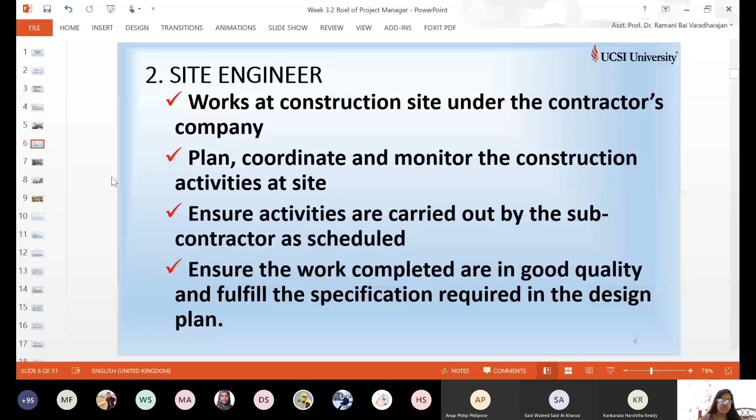His office is like this. It's hard to say—does anyone have any idea about this location? This picture is from Malaysia.

Anybody can name this? TRX. Very good. It's the TRX project, Tun Razak Exchange project, during its construction.

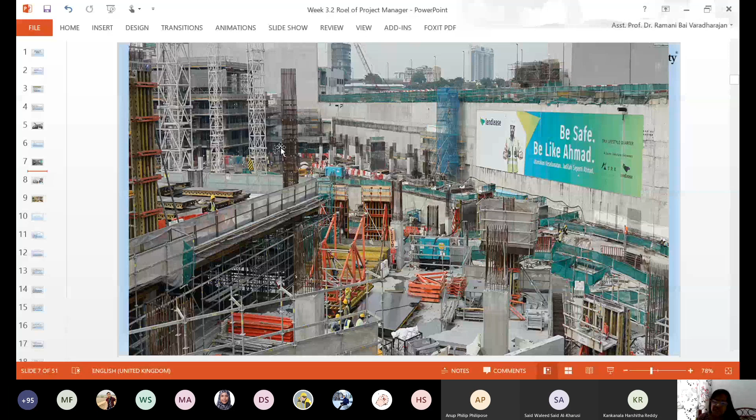His office will be somewhere in the corner, with a shelter or small hut-like office. He has to communicate, so the office is movable. It will be located somewhere in the corner for him to stay and keep the drawings, keep the materials, and keep his PPE.

So the site engineer also ensures the workers follow the safety rules at site. The site engineer's portfolio is to execute the work as per the contract documents, as per the specification, monitor, and make sure the safety is there.

Safety of the workers, he has to make sure. The site materials must be stocked safely. If it is a pipe which will get corroded over time, it must be covered with plastic. For example, if there is any leakage, he has to inform the project manager or contractor immediately, and ensure the works are constructed to the right line and levels.

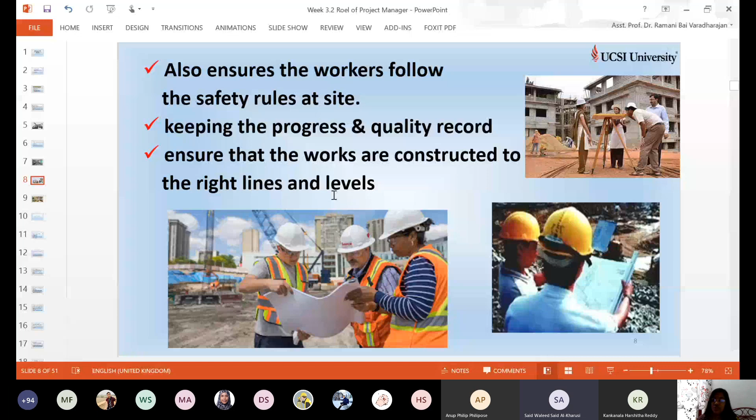He has to be monitoring each and every time and sending reports daily, based on the schedule or the planning. The site engineer has to look after all these things. He may have to go for the roofing, which should be at a high level.

What is this work? Roof? What is this thing? Looks like a slab, reinforcement, floor, roof and slab. Maybe overall it is the roof with the reinforcement. He is pouring the concrete, first filling the columns and then continuing with slabs and so on.

Columns, beams, slabs, he will proceed with, and then people are working at the site. Site supervisors should also be there to supervise whether all people are working in order.

Before starting concreting itself, he has to inspect all the spacing, number of bars, and especially the cover. Cover is most important, otherwise the reinforcement will come out. You have to check the cover at each and every point, or random points, to make sure it is proper so that the concrete is complete.

Here they are checking and discussing over the drawing, maybe about the location of elements of the building or the progress of the work.

And here the crane is lifting the truss, isn't it? The truss, they're going to fix it somewhere, maybe at the workshop, shop lot, or for any other purpose. You can see the cranes lifting. He can be supervising the lifting of cranes and materials from one place to another. So these are the things handled by the site engineer.

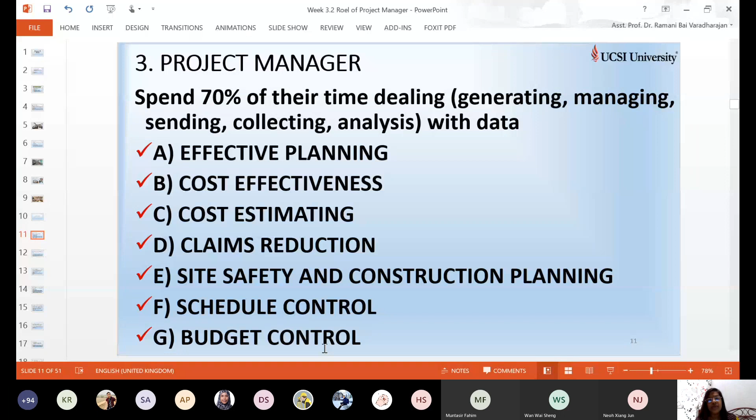Effective planning - for effective planning, he must be using software like MS Project or Primavera, or is there any other planning software you've come across? From the beginning I've used these two terms only. Maybe you students can explore more on this - any other planning software you've come across? Come on.

Planning software, scheduling software - maybe your father, parents, or uncle's company may be using one, whoever is the contractor or working as project manager will come across it. Mostly only two, and of these, they only use Microsoft, only Microsoft. Which version, 2000 or 2020?

I don't know. If you come across any information, please share it with me.

There are a number of projects nowadays because of the programming called Python. You know Python software, which controls a drone? They're similar to drone projects, drone flights, drone pilots, learning to become a drone pilot. Those softwares, because of the evolution of Python, you can get more software. You can develop your own software. Companies are developing their own software.

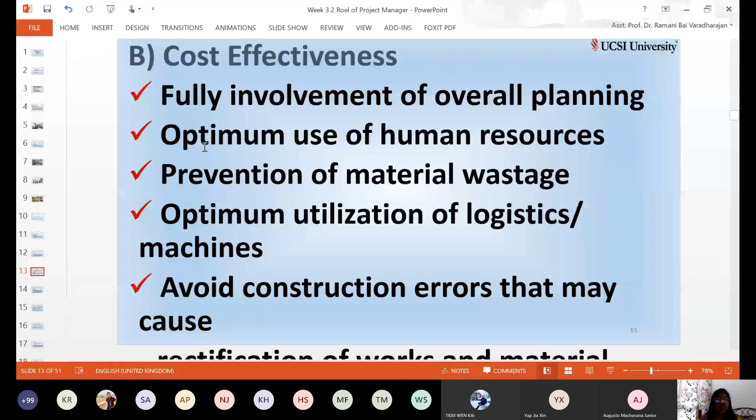Okay, cost effectiveness - did I do this? Wait, let me reduce the slide. Cost effectiveness, one moment. Okay.

Full involvement of overall planning, optimum use of human resources, prevention of material wastage - just now we were talking about this, right? Optimum utilization of logistics and machines, avoid construction errors that may cause rectification of works and material wastage.

Okay, I'll start from here. You need to involve fully, spend time - like the project manager spends 70% of the time dealing with the data. That was the introduction of this slide, isn't it? The project manager, having spent 70% of the time, has to plan properly. Optimum use of human resource, right?

You need to do trial and error during the planning itself - how many personnel involved for a particular work, per cubic meter of work, for the respective works done.

And then prevention of material wastage - avoid material waste by proper stocking, proper in and out commissioning, proper means of storage, and then optimal utilization of logistics and machines.

You should not be procuring material from very far, and the tonnage of lorry that you are hiring should be proper. For getting 5 tons of sand, cement, or other material, you should not be procuring 3 tons. You should know the capacity of the trucks and lorries you're using for your transport.

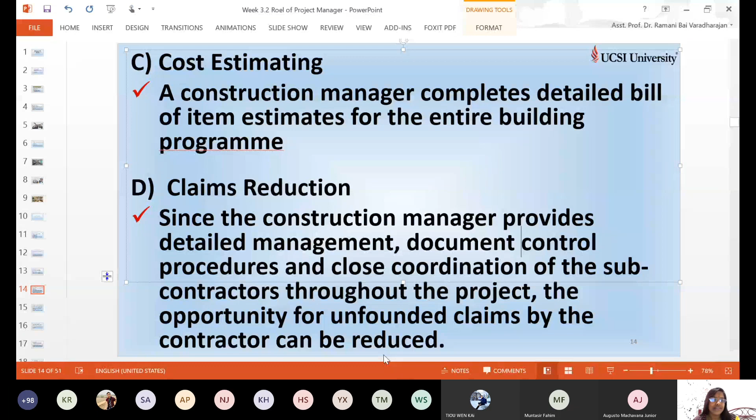At this point it is always challenging, claims reduction. Contractors say you push this bill to the manager, and the project manager says you control this claim. It is always challenging, but you have to play a nice role between these two parties, to promote and encourage them to be honest, and to have a good rapport, a good reputation for his work, his company, so that it is sustainable and comes for a long run. Avoid any unnecessary legal issues, time waste, and prolonging the project. So you should be playing a professional role between these two parties as a site engineer. Although it is very suffocating and very struggling, it is a good rewarding thing at times. You will enjoy being a project engineer or project supervisor.

Site safety and construction planning. The next thing that a project manager or project supervisor does is ensure site safety. Construction planning is crucial, a critical factor for the success of a project. A project manager or construction manager will plan for safety measures and construction phasing issues prior to the start of construction to eliminate delay. He has to prepare the site properly before starting the work, like how much length of nets is required for scaffolding, how many woods are required for scaffolding, what covering materials are required, what storehouses are required, and a clinic. Especially in some big projects, they have an in-house clinic for laborers for small injuries, giddiness, or breathing problems. At times they will address this using the in-house clinic at the site. So for a big project, there must be a clinic inside. He has to make sure the workers and all personnel involved in the construction are safe throughout the project. Planning happens at the planning period itself, not then and there. He has to have proper planning for safety.

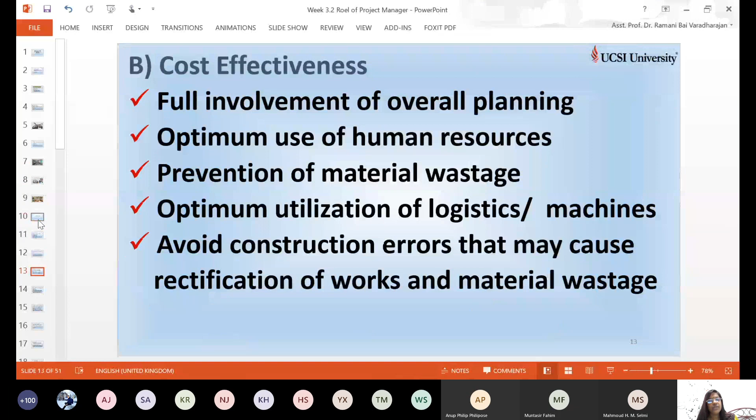Lastly, to ensure that the work is completed within the project schedule. All these things you have seen for the project manager. Any other question? Did we go through budget control? Yeah, we didn't.

Overall, three major roles are played by the project manager: time, cost, and quality, having good planning and execution of these three factors. What are these three factors we studied before as basic to a construction project? No, why basic? It's all and all - the three characteristics. Very good. Characteristics of any construction project should have time control, cost control, and quality control.

These three should be managed properly by all levels of people, not only the project manager, the client, or the worker. Here, to complete the project in a shorter interval of time, to complete it at the lowest cost possible, wherever he can save, reuse, or recycle, he can use it. Any example of recycling at this point in construction?

A very common one - earth can be reused. After excavating and going for flooring, you can fill the flooring with the soil that was excavated before, isn't it? Correct. Like this, can you think of any reuse of material at the site?

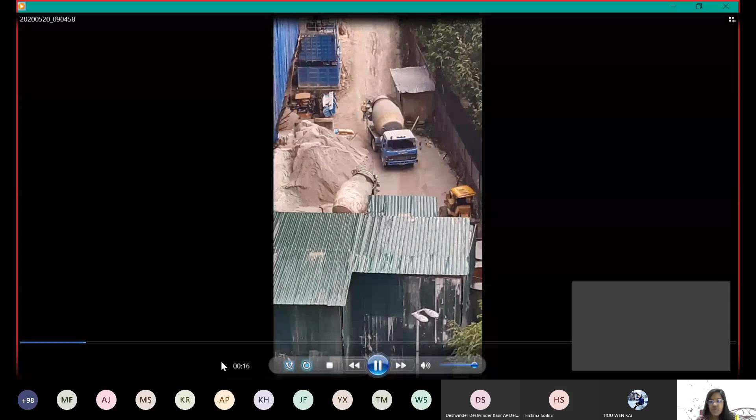A small video I captured today. Let me check. Okay, can you see? Let's go through the video for a while. Can you all see the video? Yes, yes, yes, Miss, yes.

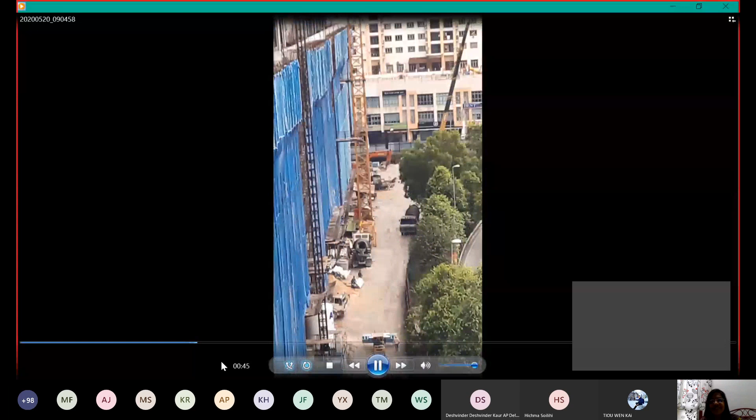First of all, find out the place - it should be familiar to you. What is this place? Have you found out? Maxim Residence, Maxim Tower - Majestic Maxim. Construction site - construction site of the Majestic Maxim.

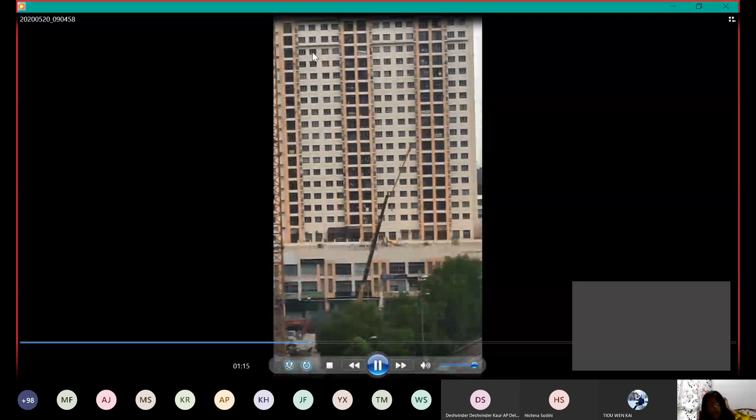Cranes are carrying the blocks. Big blocks are being lifted up - there is one here, there is one here, another one. They keep loading them in the crane and then place them at the expected location. And this is the site office for the engineers, mostly available at the end.

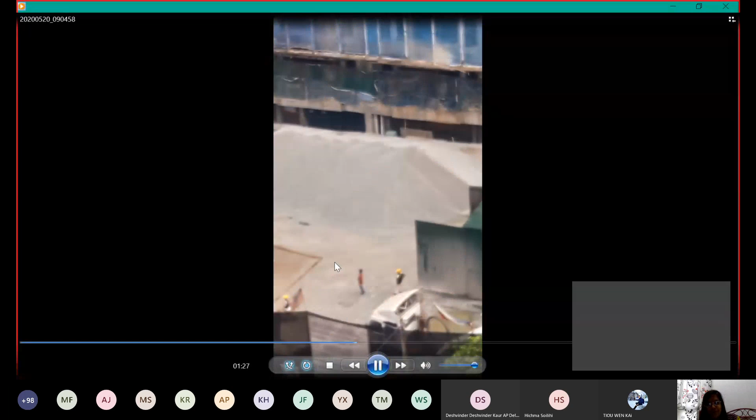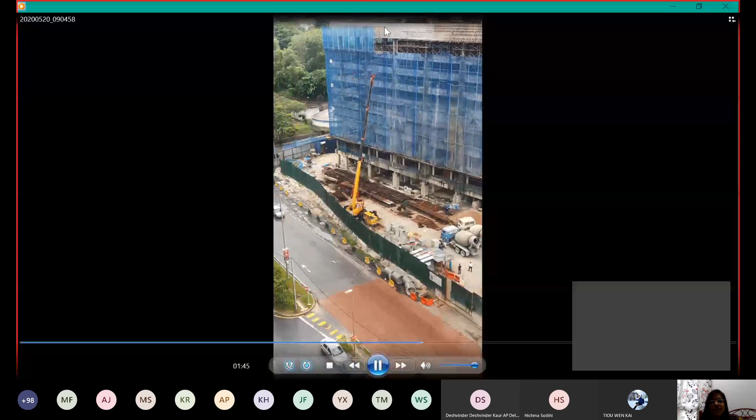What is this? What is going on here? What does it mean? The next - are those pillars? And there is something lifting. What is this? Lift. Sands.

Now I ask you the question - just observe. Can you name the construction activities going on this site? Name three activities that are going on. This is live, not live.

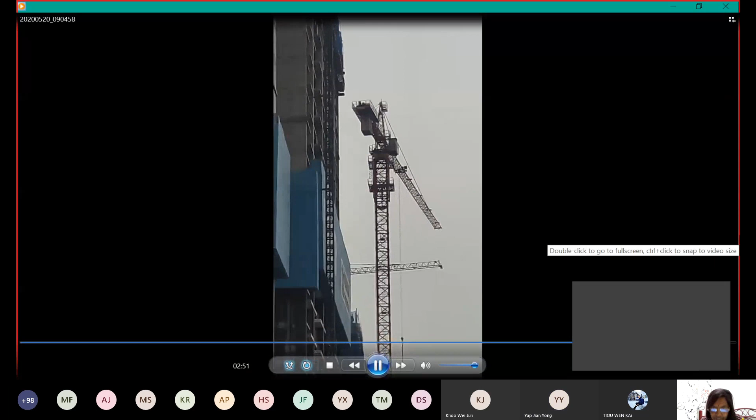Miss, can you type the question? Can you - Miss, your voice is not clear. Construction activities going on in this... Miss, can't hear you clearly, lah. Miss, we can't hear you, Miss. Because the audio is... Miss, just type up the question. So please finish the video, then I'll type the question. Finish the video.

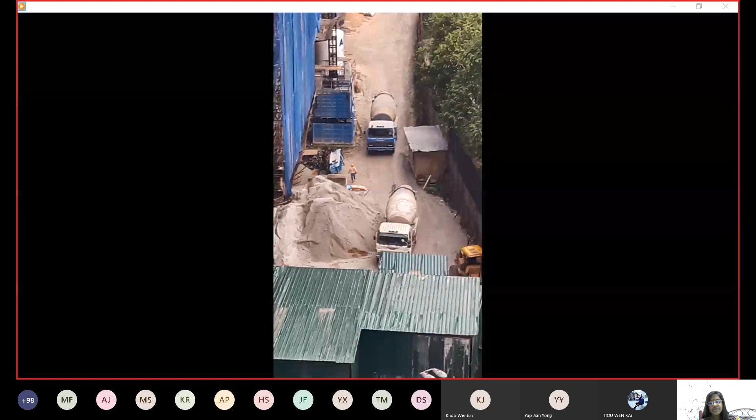You can see the materials loaded here - sand and cement mixed. No, you see here some people, something is brought out. Some materials are loaded and they are bringing them to some place.

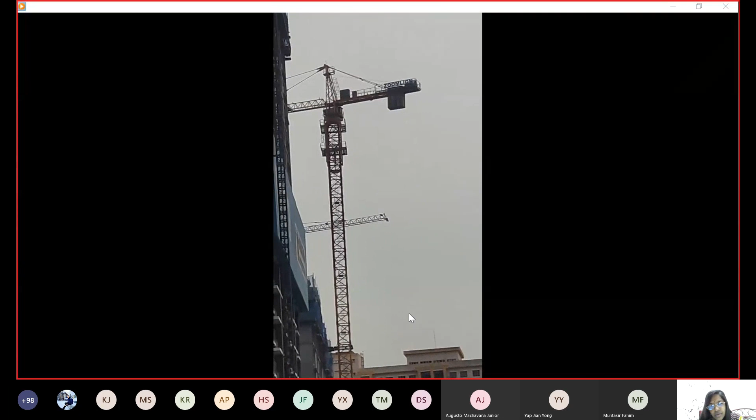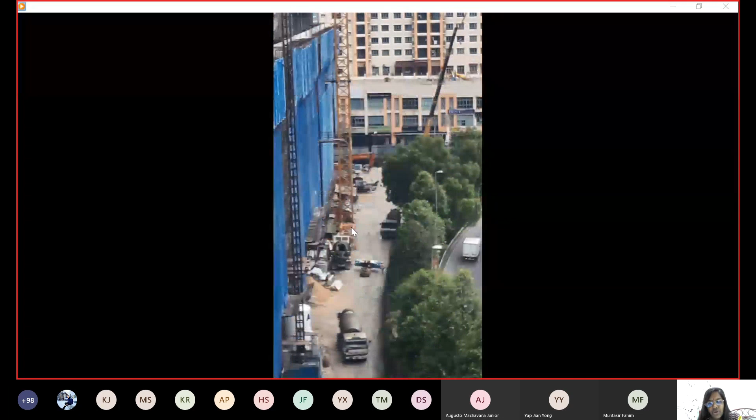Crane arrangement - one day I will do a video for the dismantling and assembling. As I told you before, you should be aware of all this information at the site. As project engineer, you should know all the activities happening at the site. Okay, I think it's going to end.

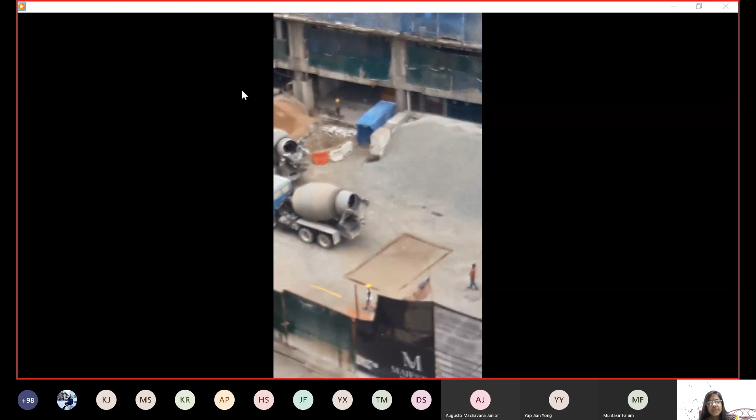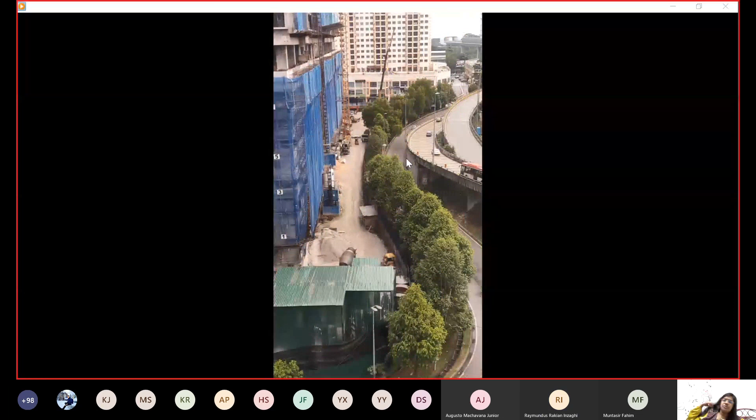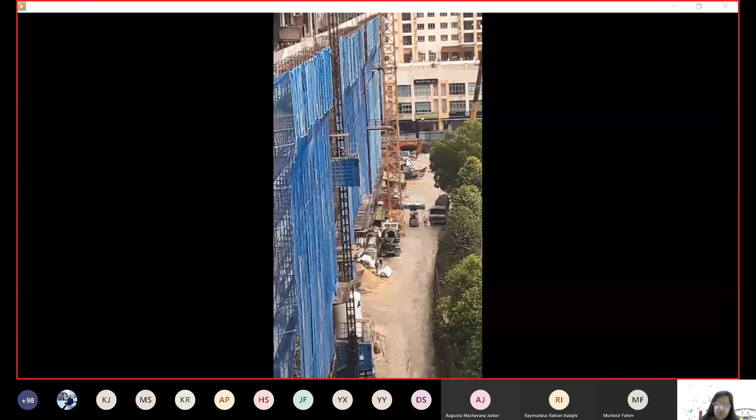Miss, I want to ask, for example if a building was destroyed, can we reuse the concrete? No, you can only use it as a filling material. It lost all its properties once it's hardened. You cannot reuse it as concrete, only as a filling material.

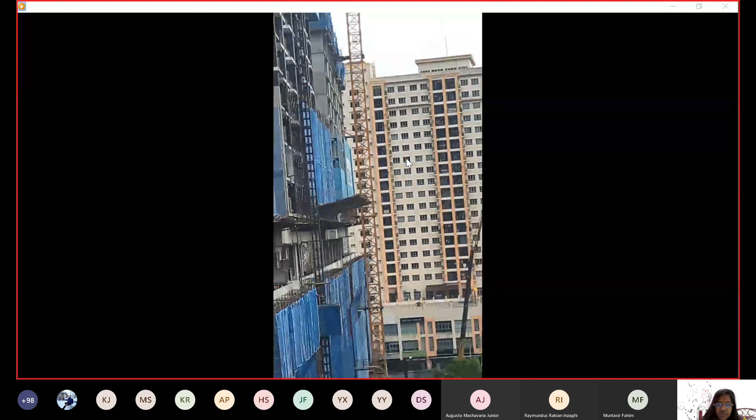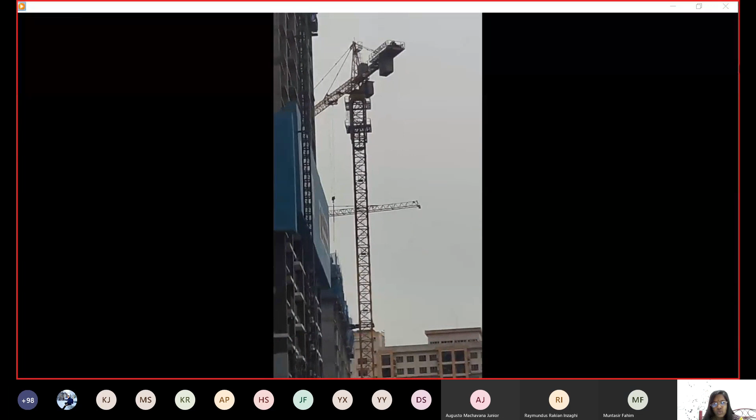Okay, you've seen this video. Can you quickly name the activities? Finish the video. Can you hear me properly? I kind of hear you but it's not so clear. Let me stop the video first. Okay, stop here, what's going on?

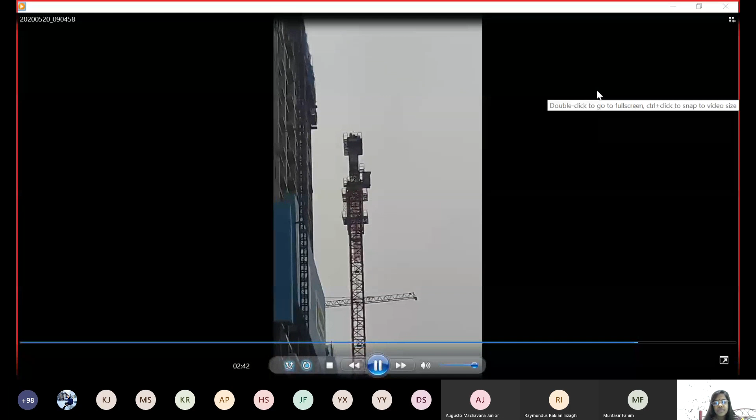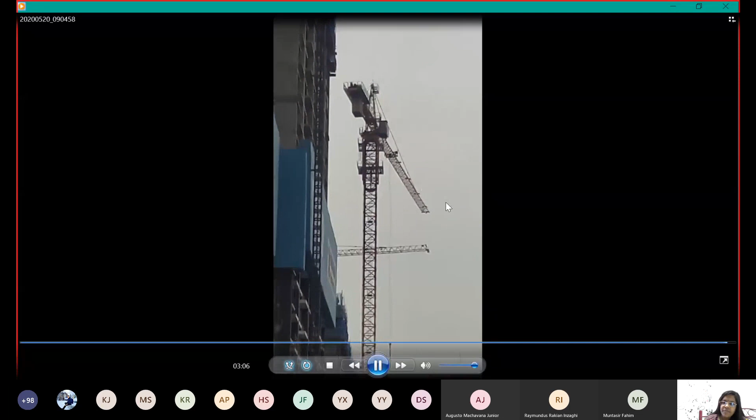Okay. It's going to stop. Okay, I stop the video. Now close it. Come on. Can you hear me now?

Can you hear me now? Yes miss, number one, yes. It's an open choice for all students, all 17 students can answer. Whoever is available take the first choice, you can answer one by one. What are the activities going on at the site now in the video?

Number one, the mixer truck is carrying cement and sand and delivering it to the site. We saw some cement and sand mixed in a spot, and someone carrying those to the site. Something is carrying that stuff up. No, the mixer machine is not carrying the material. The mixer machine is brought to the location of the sand or cement, which will happen later. After bringing the machine to the material site, they will start mixing the material.

Okay, because it has to be proportioned. Ratio has to be maintained, isn't it? It is not that it is carrying material from one place to another. The truck is brought, the mixer machine is brought. It's the trolley, the lorry coming in, right? The trucks are carrying the mixer machine to the materials yard so that the concrete mixing process will start.

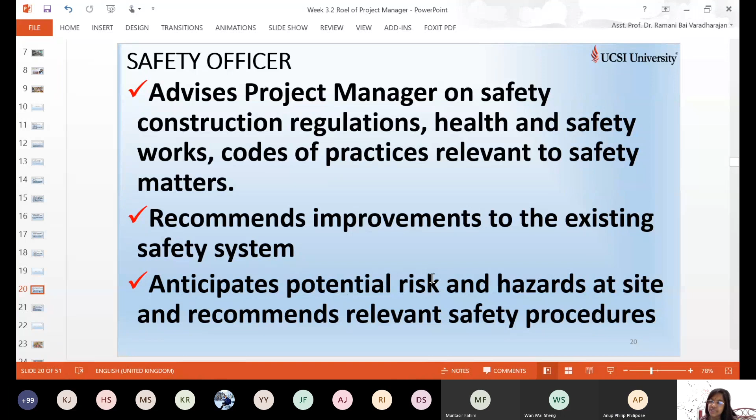Anticipate potential risks and hazards at site and recommend relevant safety procedures. Like falling from height - people working at height should be wearing proper belts, and anchorages should be checked before they go up. To attend work at higher levels, they need to be properly checked for their attire, their belt, the rings, and chainage before being sent up. You should know the potential risk of working at height, or of a particular proportion or window at a certain level, height of wall, or other requirements set by the clients. You need to understand and quantify the risk before you accept.

Ensure all plants and tools operate according to the safety regulations laid down by local authorities. All the equipment you're using - motors, gas-related equipment, plants, tools - have to follow regulations. If you do not know, immediately approach the personnel in charge, like the mechanical engineer, or the project manager, who will in turn communicate to the mechanical engineer to fix the problem. Maybe for the ventilator, tools, cranes, motors, engines, or paint-related, chemical-related things you are using - if you are not fully aware, immediately approach the people at site, your supervisor, your manager, or your department to fix it immediately. That's your role.

You can always check in line with the local authorities. As I said before, one of the prime roles played by civil engineers is this: he has to play a good role between clients, local authorities, and the government. If he's doing any government building, he has to play a major role in managing the interests of the clients and the norms and regulations set by the local authority, which may vary from the state government. So you need to convince all these parties in deciding a particular shape, height of the structure, or any other interested things that have to be built.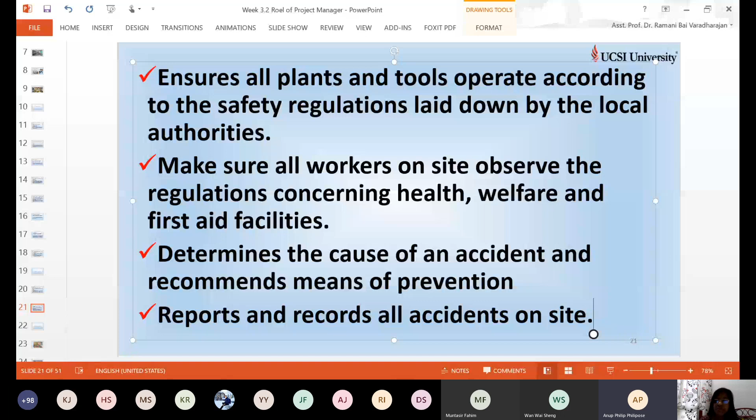Okay, next, last one, we are going to finish. Don't worry, we are going to finish within a few slides. Come on, we are on as per the plan. We are doing it. Construction workers, come on. See, these are the people. See, what is he doing? Come on, quickly, what is he doing?

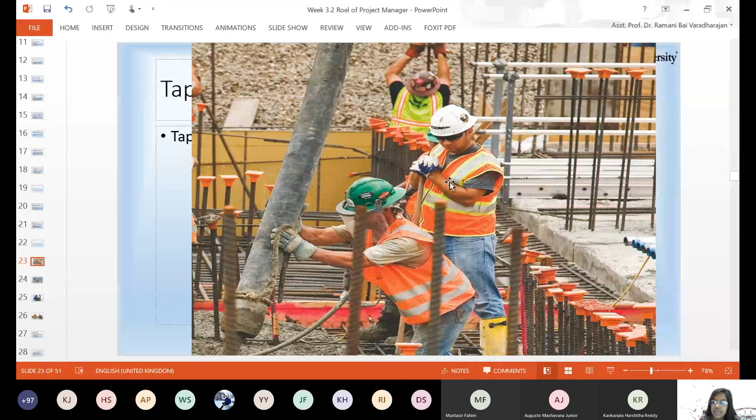Okay, they are erecting the piles inside. The pile may be brought by a crane, positioned here by the men, the laborers here. So the laborers are constructing the pile here.

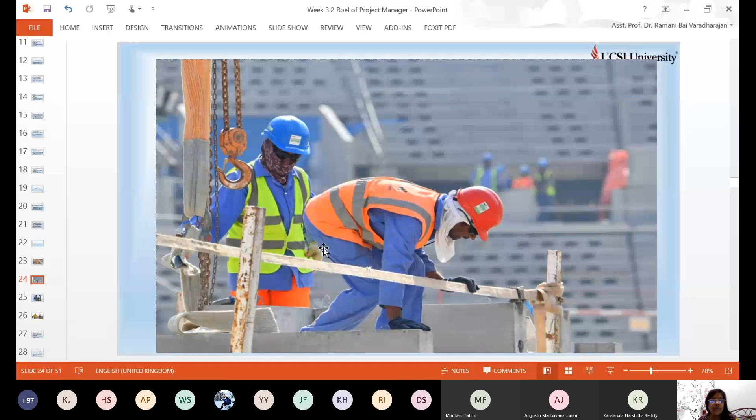Next one, what are they doing? Again laborers, some laborers are at work in the construction site. What are they doing? Lifting. What lifting? Lifting blocks. Oh, hooks, crane hooks, very good, you can see the crane hooks. Okay, they are going to lift.

Maybe what is this, can you see this? A thickness? Can anyone tell me what is this? Might be, see the thickness. What was it, partition walls, right? 10 centimeter, 15 centimeter, and less than that, all called partition wall. Main wall can go up to 1 foot or more, like 20 and more. Okay, partition walls, it might be a partition wall or a slab. They are going to lift it using this hook, which is connected to a crane.

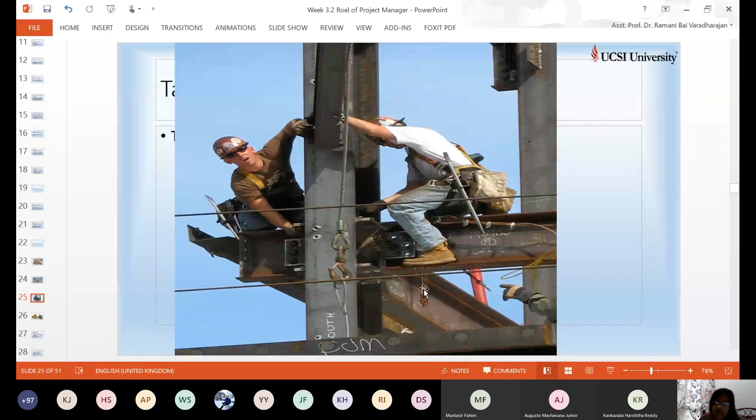Maybe some construction will have RCC, some construction will have full steel work, steel fabrications, maybe fabricated outside or fabricated before. Okay, here you can see the column. This is another column, I-section, maybe I-section. I think I can see it here. This is one section, this is another section.

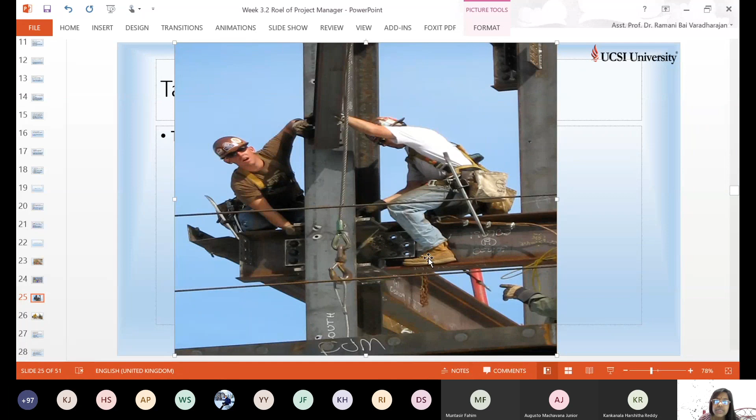This is a joint. They are connecting by the bracket. A bracket is joining these two beams. The beams are made out of steel. When you see the cross section, it may be I-shape or rectangular shape, any type. These two beams are connected at the conjunction, the meeting place or joining place, using the bracket. They connect the bracket to these two beams together with the column. This is the column, this is the beam, and this is the bracket.

They are checking and screwing the joint at this point. They are doing some steel work. Laborers are doing steel work. Next, there is a hand supervising.

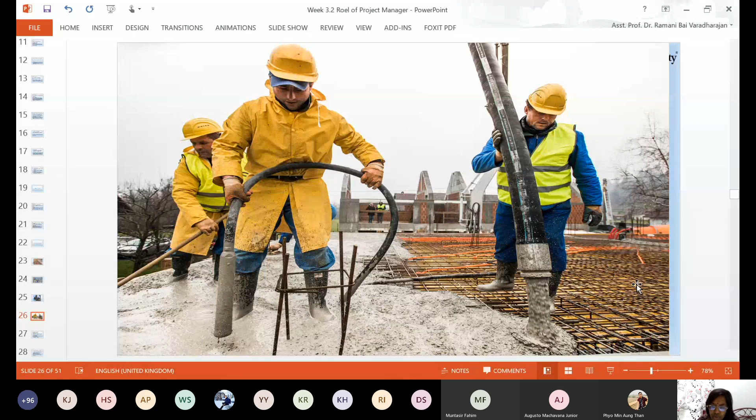Yes, these are all the steel reinforcement, which will bear the loading. Later you will study how many bars, what size the bar is, what the spacing of the bar is, when you go for designing the columns and beams. This is the slab.

This is all reinforcement. The yellow color one at the bottom is the formwork, which is going to hold the concrete. On top, concrete is poured. See, there are conveyors using a tube. It might be connected to a crane, or to a pumping house for concrete, or to the mixer machine. Concrete is mixed by the mixer machine and poured to the site here.

And he's doing the compaction. Once you pour the concrete, it should be compacted properly, meaning all the air voids should be removed so it is completely settled and the strength is achieved. So they are pouring concrete, there is some consolidation going on, and he is doing some leveling, so there shouldn't be high and low spots. To have a level ground, he may be doing the finishing work. So these three guys are involved in concreting of the roof, or any slabs, or other similar work.

Okay, next, that's all. You can pick pictures like this from Google videos, so many. There are some interesting videos you can watch of how the construction process is taking place. I stop here, any question you can ask me.